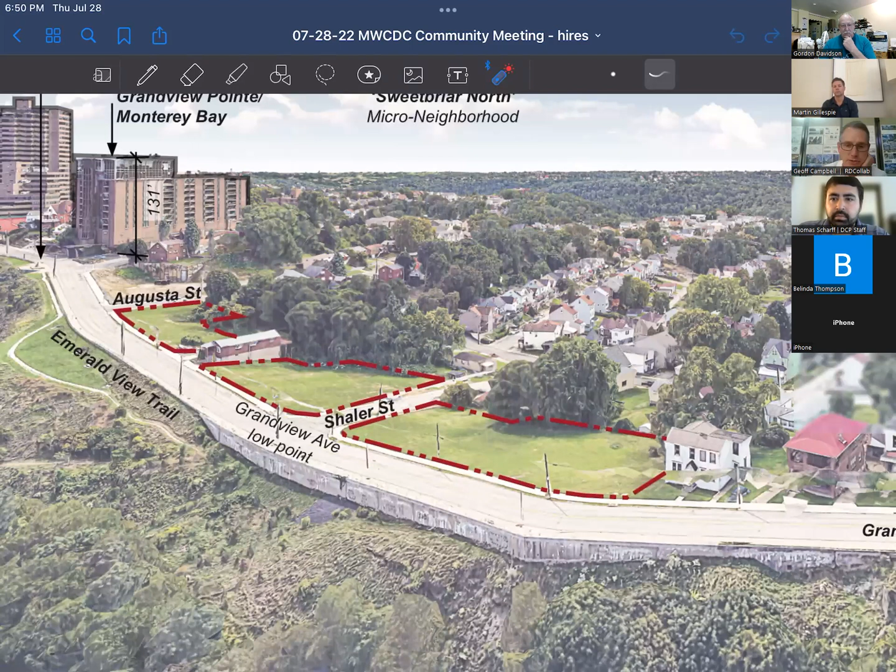Thanks, Marty. Hopefully everybody's familiar with the site. Where we're looking right now is towards the very west end of Grandview Avenue. Currently, we've got the Trimont, Grandview Pointe, Monterey Bay restaurant. There's an undeveloped parcel, and then there are 3 currently grassy lots that are contiguous along Grandview Avenue.

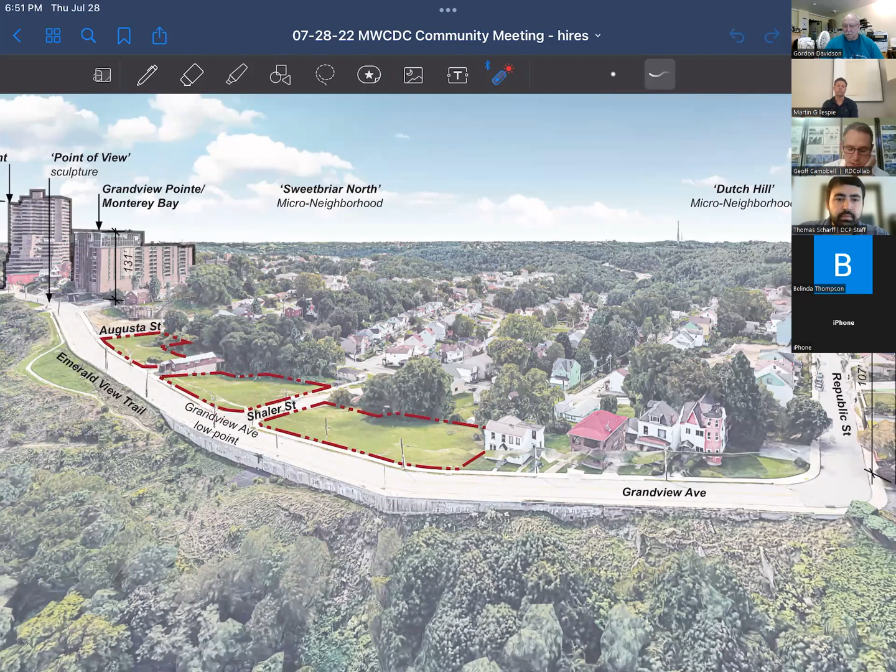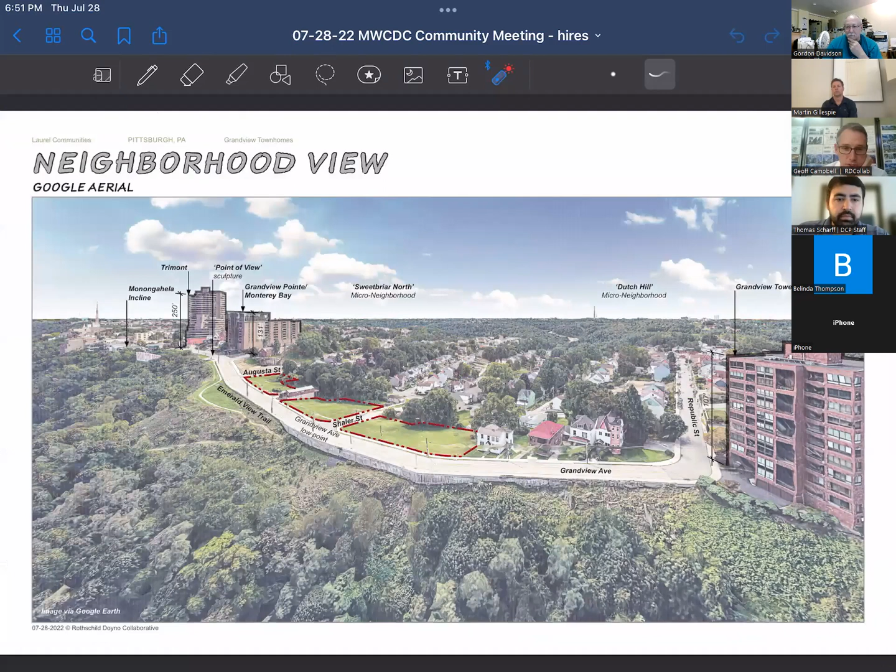So these are the particular parcels that we're looking at. And then, of course, it terminates here, turning the corner at Republic and Grandview Towers. One thing I wanted to call attention to on this aerial were some of the heights of the buildings. Right now, Grandview Towers is 107 feet tall to this point.

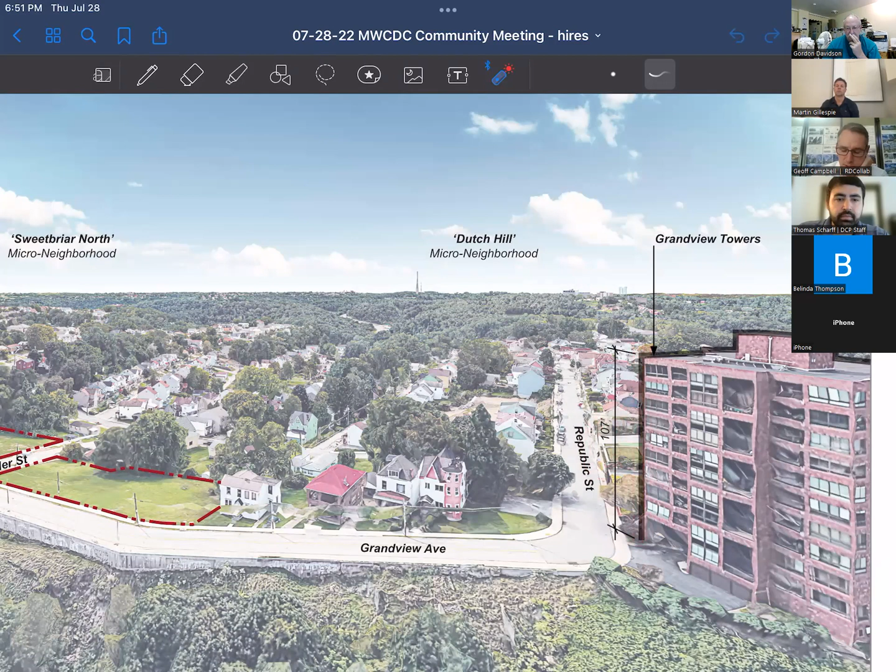I bring that up because, as you'll see later on when we get into the zoning, there's a 40-foot height limit on the parcels we're looking at. There's also the ability to go for a special exception with the city to create a 100-foot building. It's not an option we're choosing to go down, but it is an option the site could do - to create basically 100-foot tall buildings on a majority of the site, which is roughly the same height as Grandview Towers.

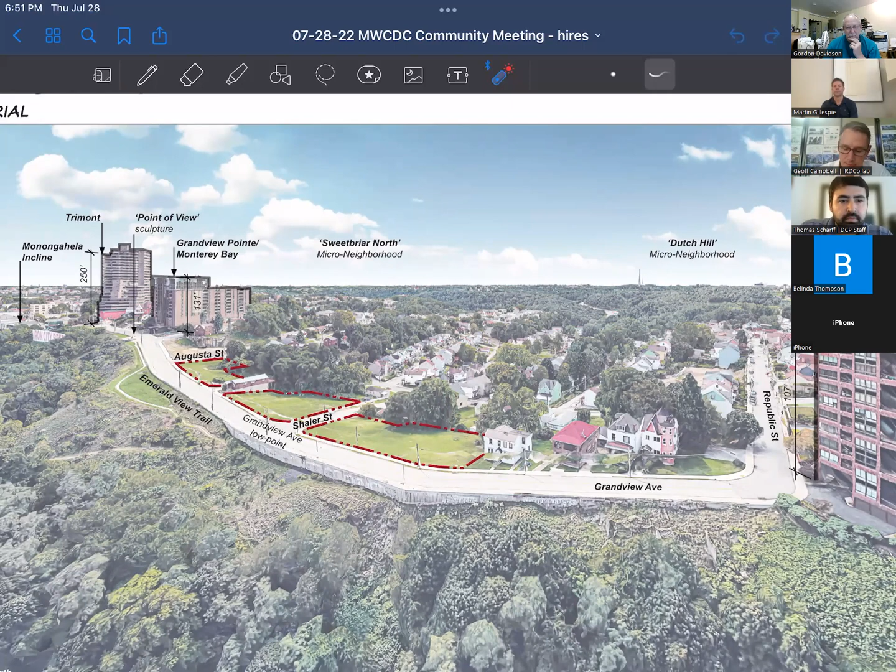So that's the site in particular, and now in more specificity - here we have the rivers to the north. I've kind of rotated you on the site. The parcels we're looking at are actually 23 parcels that are currently subdivided, but we'll be reconsolidating them as part of this plan. They actually create 4 non-contiguous areas.

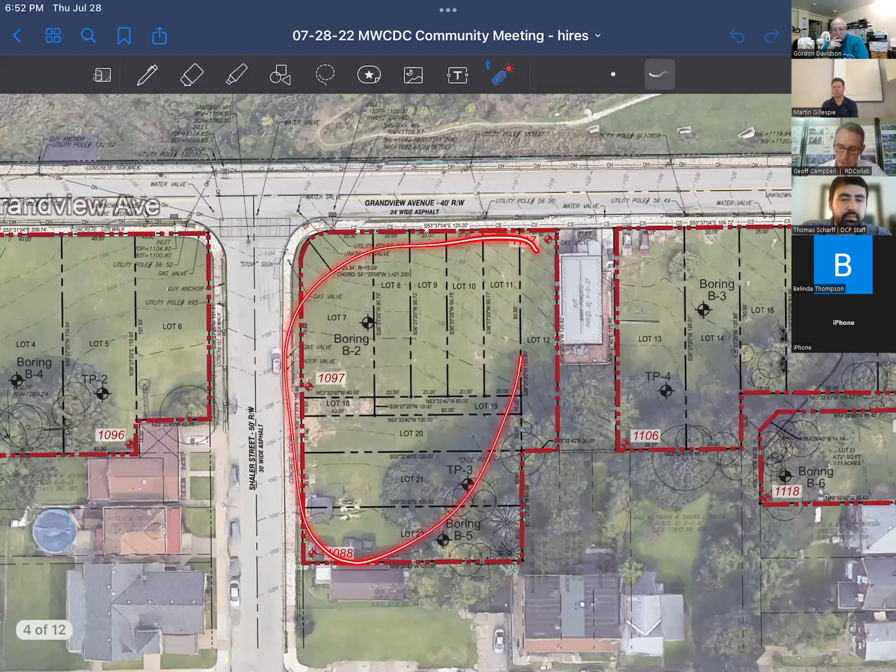So there's one that basically runs from a private property all the way down to Shaler Street. It's broken at Shaler Street. There's another parcel and then another private residence. And then the final 2 parcels run up against the corner of Augusta, currently separated by a right-of-way here. So it's our intent, since we own both sides of that right-of-way, to incorporate that as part of the project through a city process.

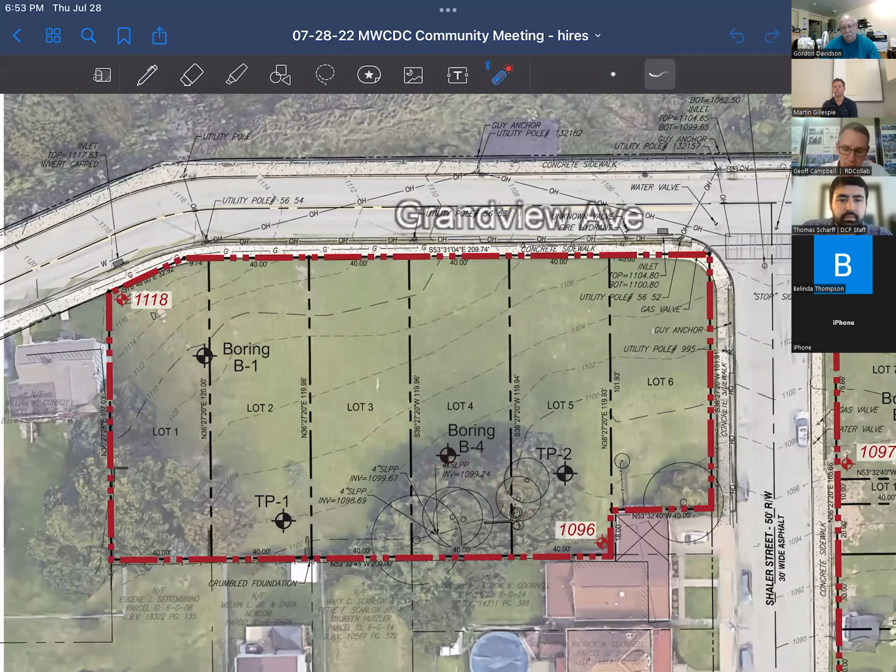Another thing to call attention to, for anyone who's been on the site, is the topography and grade here. I heard somebody reference it as a sledding hill at one point, which doesn't surprise me at all. Right now, on this first parcel, we go from an elevation of 1,118 down to 1,096 - about 23 feet of slope across that site. And that's the one we've been calling the flat one. This one is 1,117 to 1,088.

You can see that's about 29 feet of fall. And then the last one here is actually 33 feet of fall as you go across the corner. That's Pittsburgh, first of all, but it's also something we're extra sensitive to when dealing with stormwater and drainage. We really wanted to make sure we were protecting curb cuts and things like that, working with that grade as much as we can. So it was a big site consideration as we were laying stuff out.

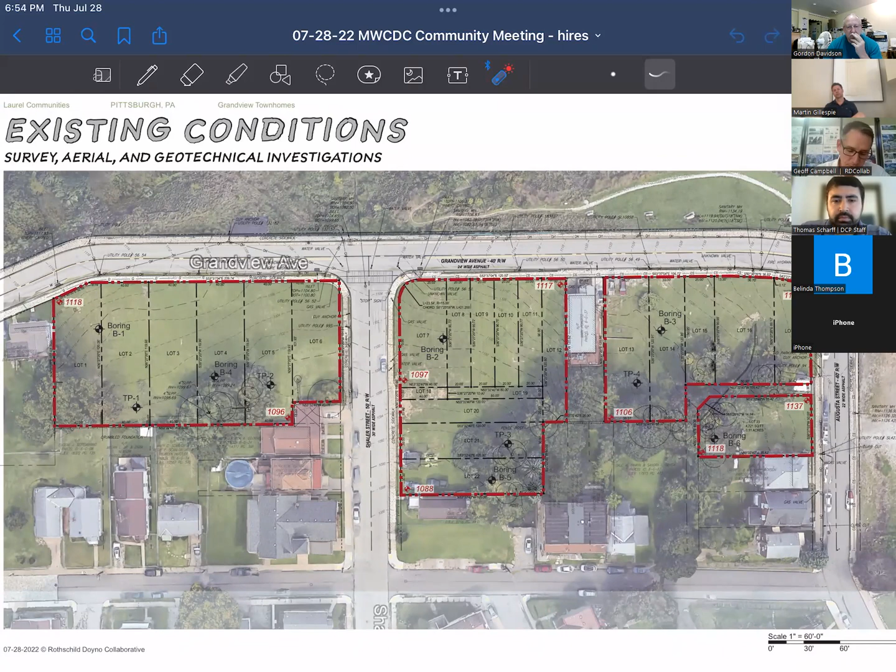The other thing to call attention to on this graphic is the geotechnical work we did. We performed 6 different borings throughout the site, where they come onto the site and drill a hole down, in some cases as deep as 45 feet, to see what's under there. We're very conscious that Mount Washington used to be Coal Hill, so we wanted to make sure we were okay when it came to undermining, and okay from a general grade standpoint as well.

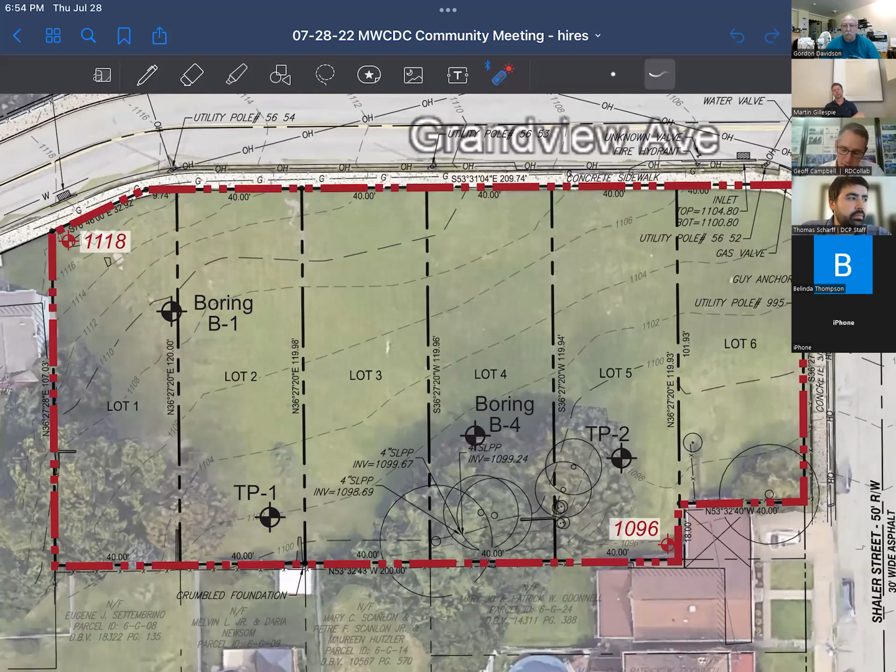We did find out that there is a lot of fill towards the middle of the site. So if the grade itself goes something like this, then the grade underneath that kind of goes even further. It was a big consideration as we were laying out foundations and thinking about what we were doing for the building and for the buildings.

The other thing we were looking at was coal. We did find coal, we did not find any undermining. There were a couple spots where there is still some coal existing under there, but nothing where it's been mined out that would create a potential hazard as we're laying things on top.

So that's the existing conditions. When we met with the development group, they also shared with us the long history of Grandview Avenue and the planning and all the energy that's gone in around here. They had sent a number of reports going back to actually 1982. So in this 40 years of history, it's been a fascinating read to hear some of these recommendations, a lot of which have been codified at this point.

I think the city has recognized through its zoning and through Mount Washington's efforts how significant Grandview Avenue is. It really is a true resource to not just the neighborhood, but to the city and the region at large. We wanted to make sure that as we were laying stuff out, we were respecting that attention to Grandview Avenue. I think you'll see in our site plan some of the moves we've made to do that.

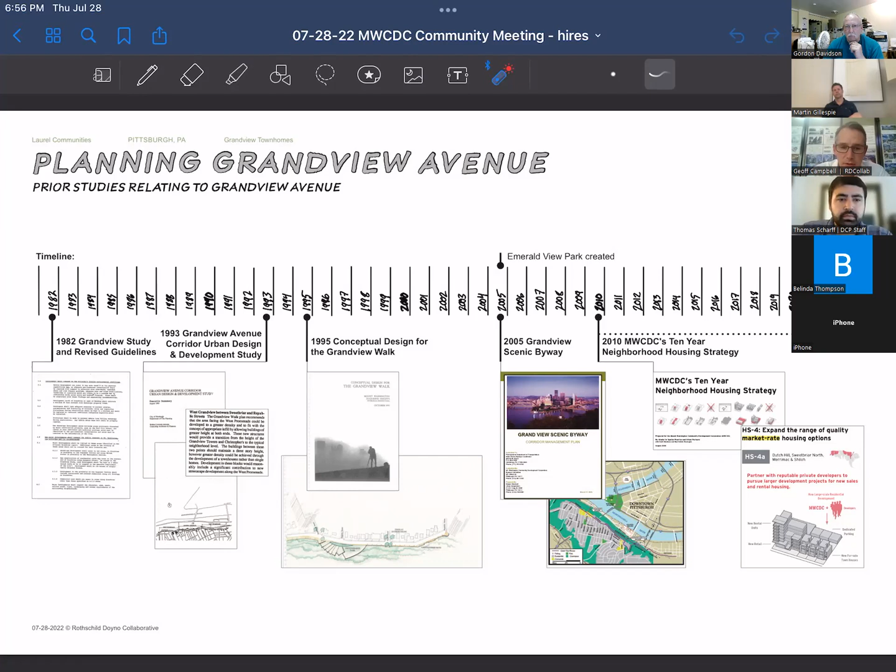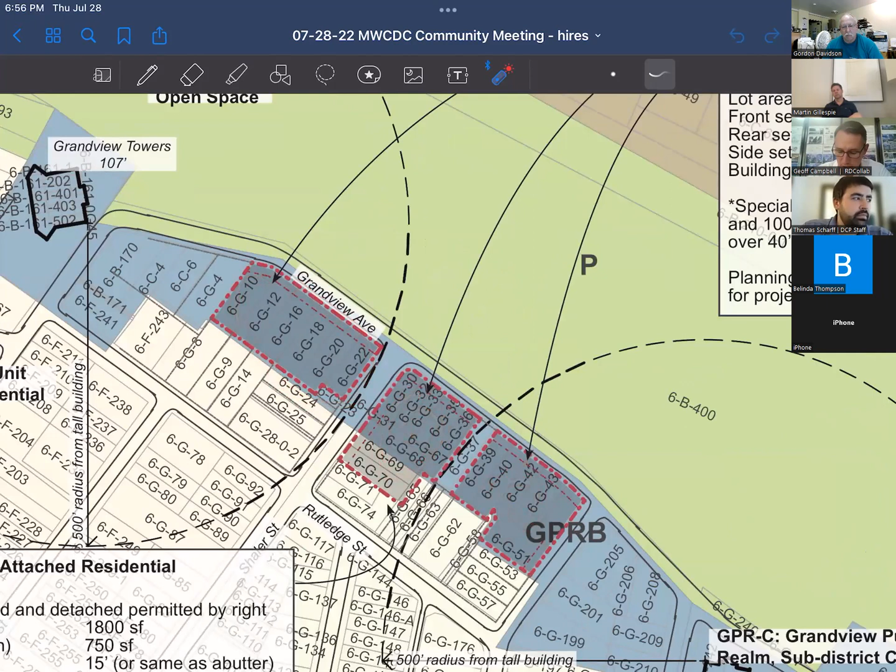And then here we get into the nitty-gritty stuff. This is a zoning map of the area. Our parcels right now are kind of highlighted here in the middle. This is the zoning map you can get online from the city that talks about what you're allowed to do in each individual parcel.

The blue area here, which covers the majority of our site, is what's called the public realm. This is a Grandview public realm, sub-district B. The public realms are just a few throughout the city, where the city has recognized and given special zoning status. The primary focus of which is that they do come to Planning Commission. So if we were proposing what we're proposing in other parts of town and it wasn't in the public realm, there actually wouldn't be a Planning Commission process, it would just be approved by zoning. But because this is such a visible area, that was part of the process here.

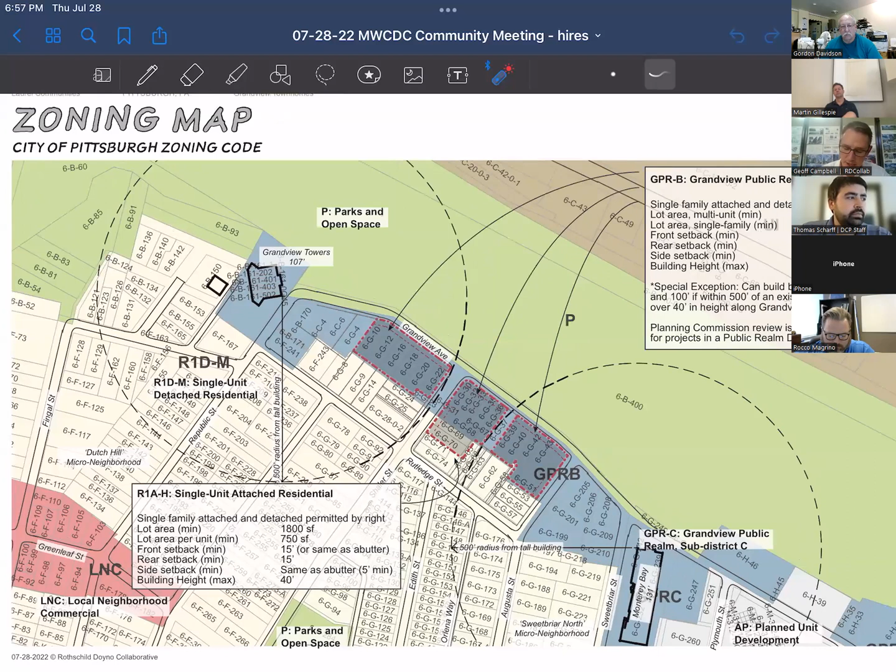So you can see in our breakdown, we are required to do that in the public realm district. We're proposing townhomes, and those are not only permitted by right, but actually in the sub-district, only residential is permitted at all. So right now we feel we're doing everything by right there.

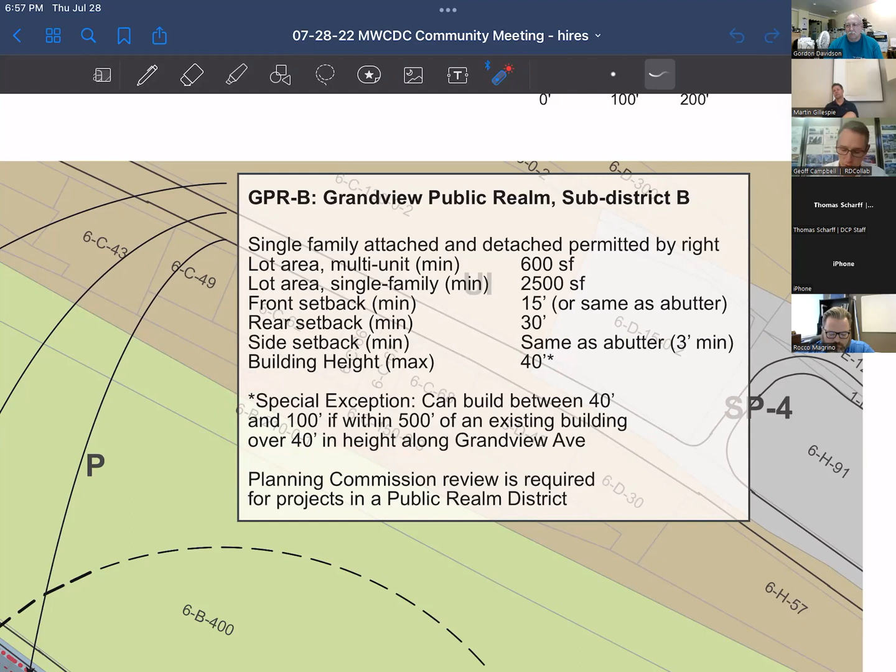And then just a couple other things to call attention to. There's what's called a setback in the front, which means every building has to be 15 feet off of the street. The other thing I mentioned earlier is that building height is limited to 40 feet, although you can pursue a special exception for anything within 500 feet of an existing tall building, to go up to 100 feet. That's what these two circles are, basically working off of Grandview Point and Grandview Towers.

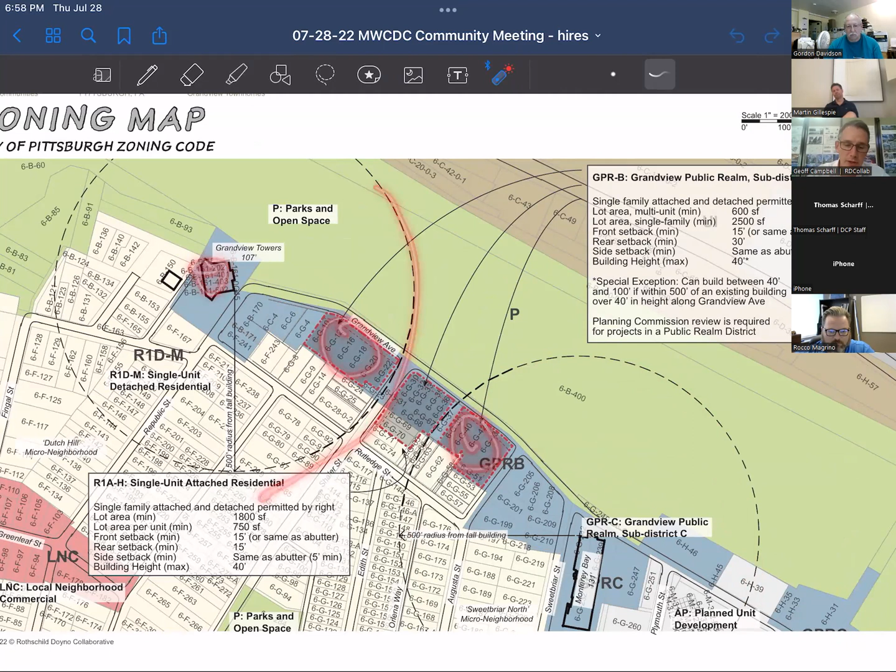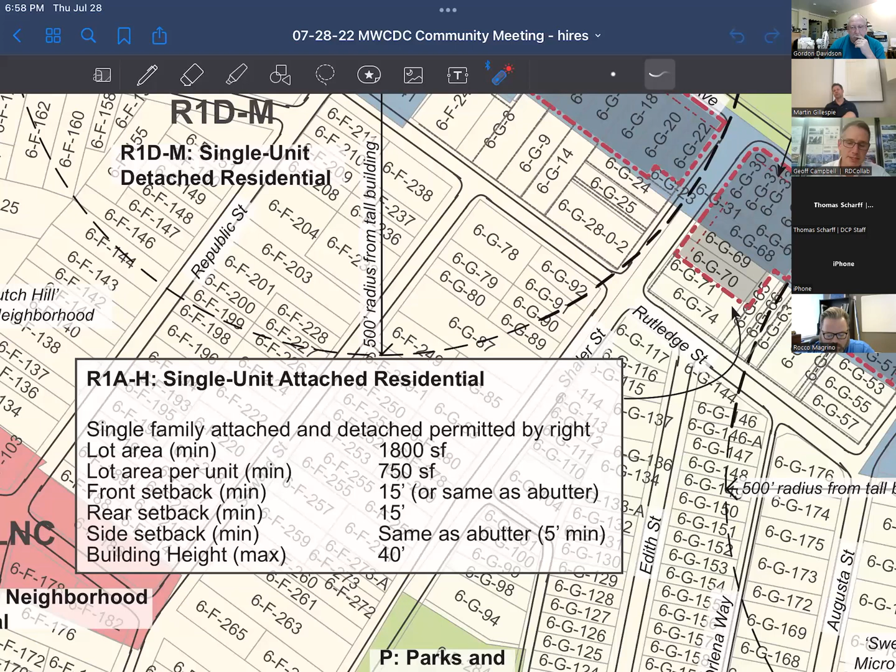A 500-foot circle would really permit anything up to 100 feet within those two areas. There are a couple parcels at the end that fall outside of that district. Those are under the R1A single unit attached high density zoning. It has effectively the same height, the same setback, it just does not have that public process. So what we're proposing would be consistent with this, but it actually isn't part of that review process. That's the zoning.

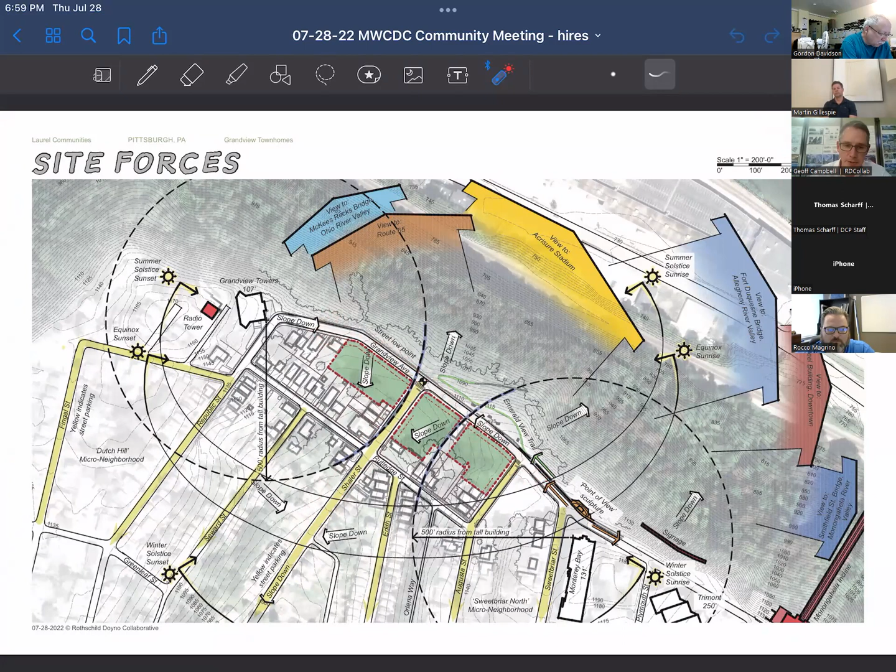And so that led us to what we're proposing. This is a 26-unit townhome, or 26 units of townhomes. As we mentioned, knowing Grandview is where the view is, we really wanted to make sure we were focusing as many buildings as we could to that facade, both because of, frankly, just marketability. I mean, that's where you really want to put your building, and that's the view sells. But then also just from an urban standpoint, this does create more of a streetscape, more of a pedestrian-oriented experience up there.

In doing that, we also knew that we didn't want to put curb cuts. We didn't want to put garages or driveways along Grandview Avenue. We wanted to make those backloaded as much as we could. That was a little challenging because of this grade issue. You can imagine with the sloping in so many different directions as you come back, to get driveways to the back can be challenging. But we're pretty happy with where we ended up.

We basically end up with 3 blocks, and each one of those blocks only has a single curb cut, so anyone who's trying to get into any of these parking spaces, or into the back of their garages, would basically only come through that curb cut rather than having individual ones. It took a little bit of work, and Rocco and PV were able to really work with the grade to figure out how to do it.

We tried, I can't tell you how hard we tried to have a curb cut off of Augusta, but we just found the grade was too extreme there to be able to put it over there. So when we ended up doing this, we did have to put one curb cut along Grandview. It wasn't our first choice, but it was really a necessity. The only other option there would have been having curb cuts in each building to get into that front. So we do have one here. Some preliminary plans we had another building there, but we eliminated that building in order to get that curb cut to work.

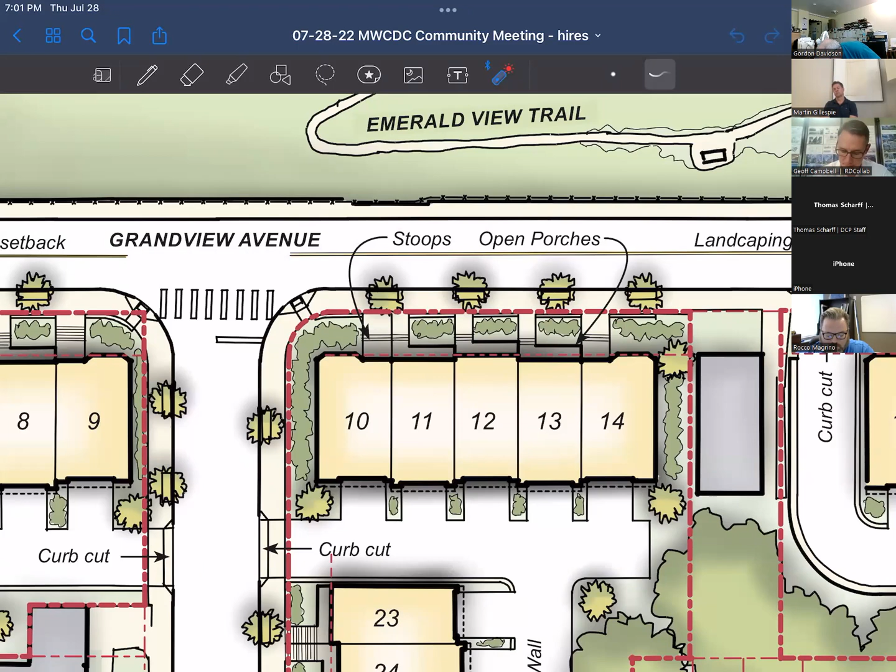So then before we go into the elevations, the other thing we like to do is when we're laying out a building, we really want to try to make these buildings as contextual as possible. Marty, as he mentioned, and Laurel has a long experience with townhomes, and they've come up with some plans. They know what the market responds to, some nice, open, really contemporary plans that have been very successful. But we also want to make sure that they fit into the neighborhood.

When we worked on those projects in the Strip District that Marty shared earlier, we were the architects for both. There really aren't that many townhomes there, but we recognized the prevalence of brick, and tried to pick up on window patterns that are out there, things like that, to make something that felt like it belonged in the Strip District. We're trying to do that here as well on Grandview.

One of the challenges, though, is that Grandview is almost defined by its eclectic nature, because these buildings have been developed over time. And frankly, I think because of some of the more high value real estate, they tend to be a little more stylistic, so you end up getting a lot of different styles all over the place.

So we looked for some themes, tried to understand what we could do. We had a big study that really looked at a lot of these. I just picked a few excerpts here to share. For some reason the one on the right keeps fading out, but I'll come back to that.

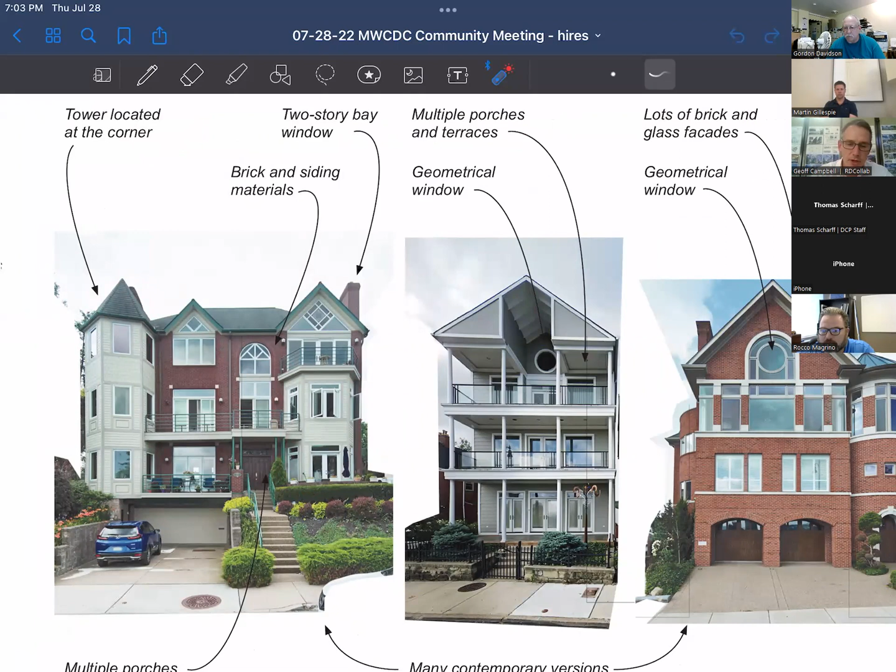But you can see, one thing we were kind of surprised at was a lot of towers, a lot of two-story bay windows, you get the chamfered view there. That's something that popped up a lot. I suspect it might be because of the views, you want views in more than just straight out, actually in 360 or 180 degree shots.

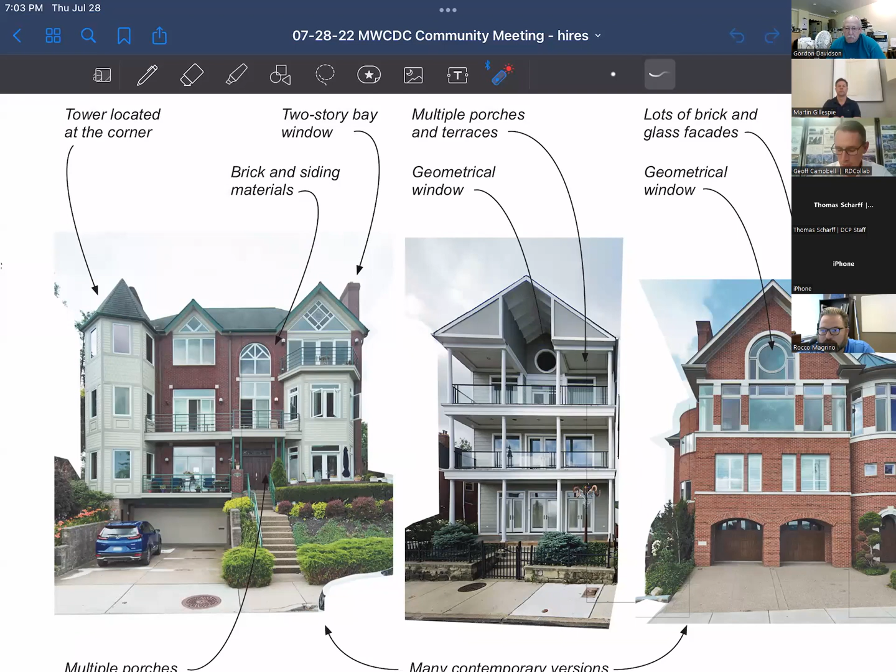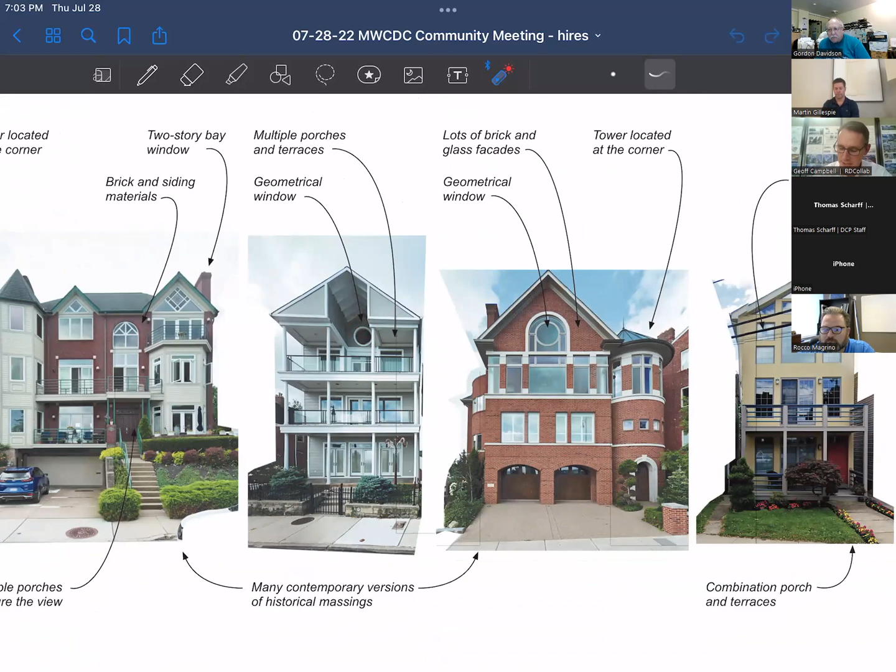Another thing was terraces. Obviously with those views, it's not like there's just one porch or one terrace, a lot of times there's multiple terraces in the area. Decent amounts of brick. For some reason there's a lot of circles in windows. We didn't end up running with that, but I think that's more a sign of the times than anything else. And then, of course, lots of glass as well, with those views you want to maximize the light.

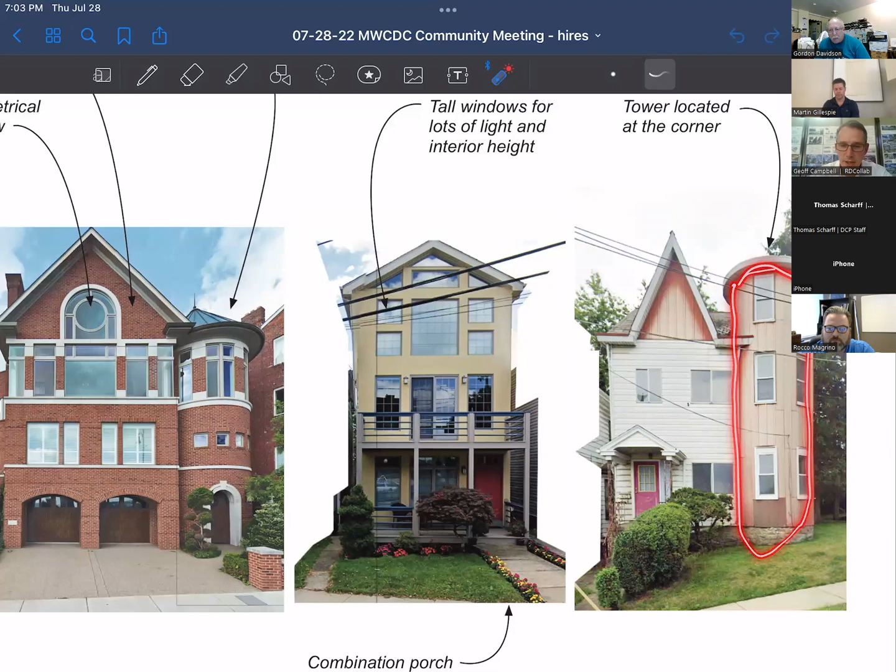And actually here's the building right on the corner of Republic, with another one right at the turret there. So that's what we kind of looked at.

We thought about it a lot, tried to process it with the floor plans that we knew worked, some of the styles, things that we knew the market would respond well to. And we're proposing these as elevations right now.

So we really tried to work a lot with a mixture of materials, we use brick, we use different fiber cement. We wanted to make sure the stepping of the buildings really helps break them up, create a little more individuality as well. We have different window patterns on different buildings, something we're playing with and will continue to play with as we move forward.

We also started to incorporate that chamfer, or that two-story bay tower, on the ends of the units, just to relate a little bit to the Grandview neighborhood, or to the Grandview street, but then also give the buildings themselves a little more difference.

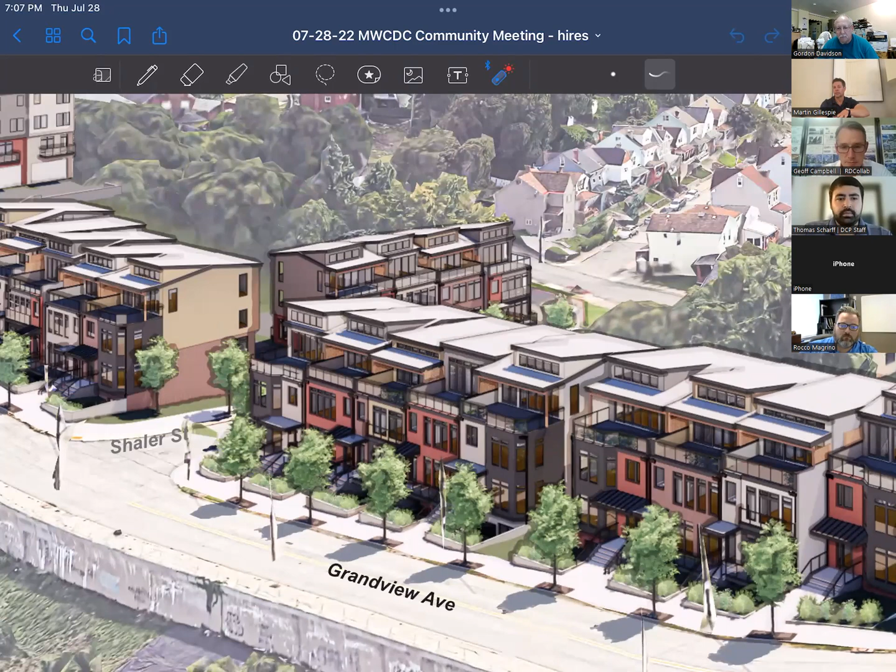So what we do know is, like Geoff said, we're going to have a combination of brick, HardiePlank, some good contemporary design, a lot of windows, things like that. I think in general this at least represents what the development would look like.

And again, like Geoff said, I think the one nice thing about this project is it's per the zoning, use by right, exactly what is in the city ordinance. We don't always have projects where we don't have to ask for an exception or a variance. In this case, we don't have that situation, so we're hoping that's a pretty streamlined process.

And like I said, this is a great opportunity for us, and hopefully to add some nice units to the neighborhood. So with that, I'm happy to open it up to questions. Rocco from engineering, Geoff the architect, and then myself as the developer builder, we're happy to answer your questions.

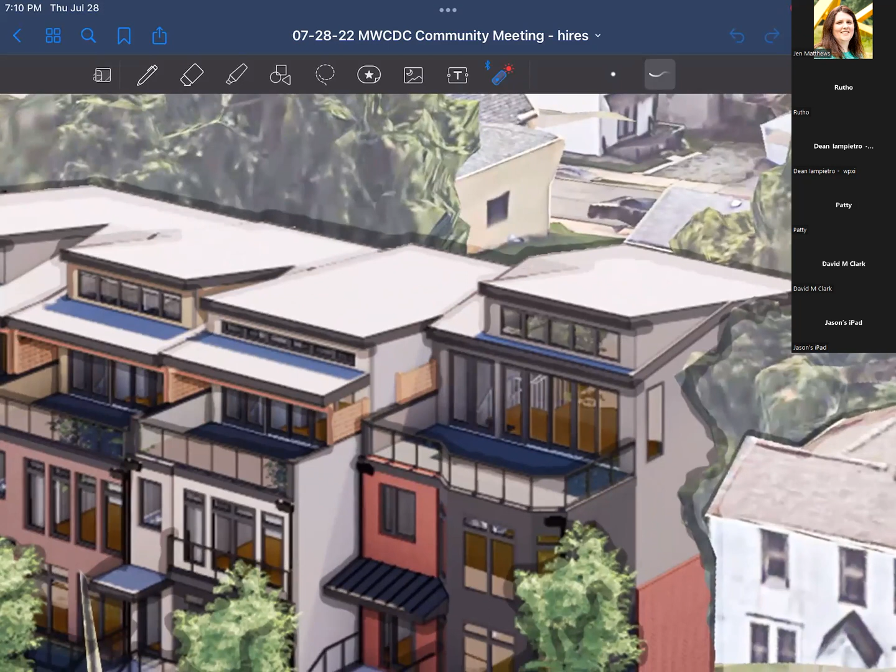Yeah, so the depth of these units on the roof, Jeff, is we're going to be like 42 to 44 feet deep, correct? Correct, in this direction. Okay, so that's not just a balcony, that's an actual outdoor living area. The width of those on the ends is around 26 feet, and the outdoor area is going to be about 18 feet. That's a better view, thank you. So that's actually bigger than it looks in this photo.

And then on the inside, we'll have a large area that's like a party room, a flex room where people can do different things. We'll also have an option to do a bedroom up there with a bathroom, so you could have a bigger area like what the people in the strip did. Yeah, I've been to your brownstones in the strip, very nice, I almost put a deposit. I live on Grandview right now, so.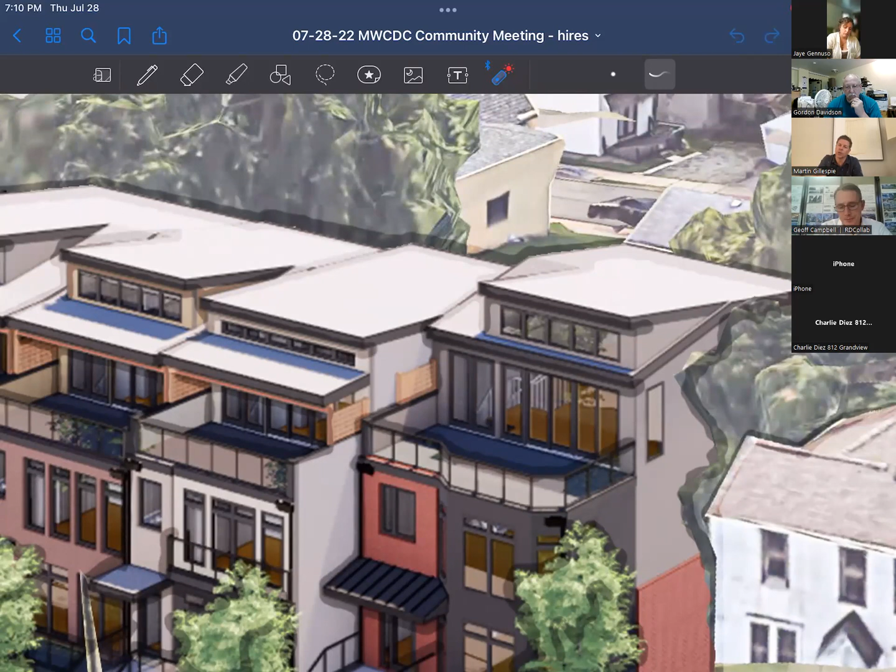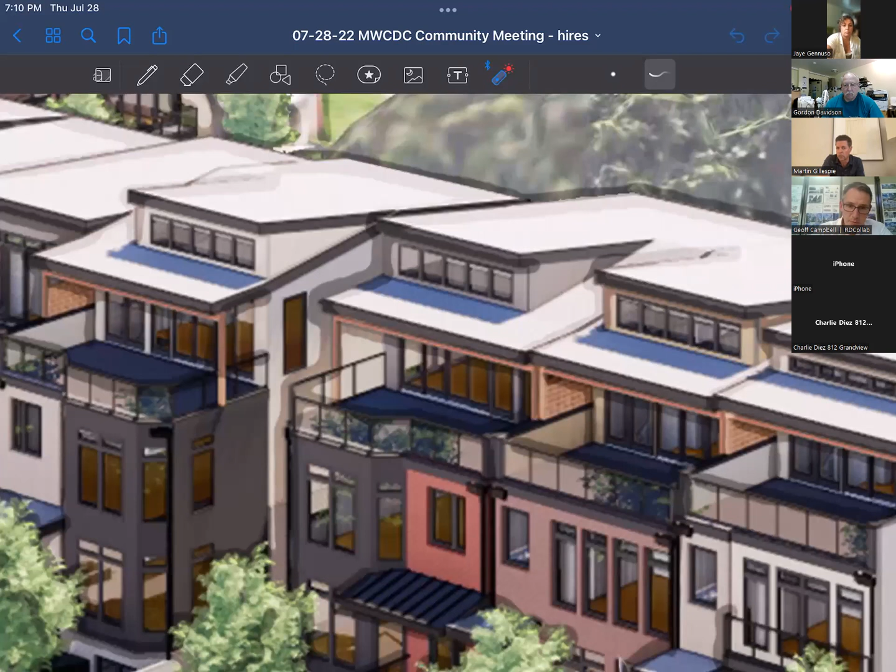Okay, yeah, we're going to focus on that. Like I said, we're still in the concept phase, but different than the bakery project - if you notice on this one, we have the option for some covered outdoor area, whereas the other doesn't have it covered at all. That's the first time in any of these projects we've been able to do that. So there'll actually be an area where you can sit out on the deck and put your furniture, and those areas are actually going to be bigger than the ones we have in the strip.

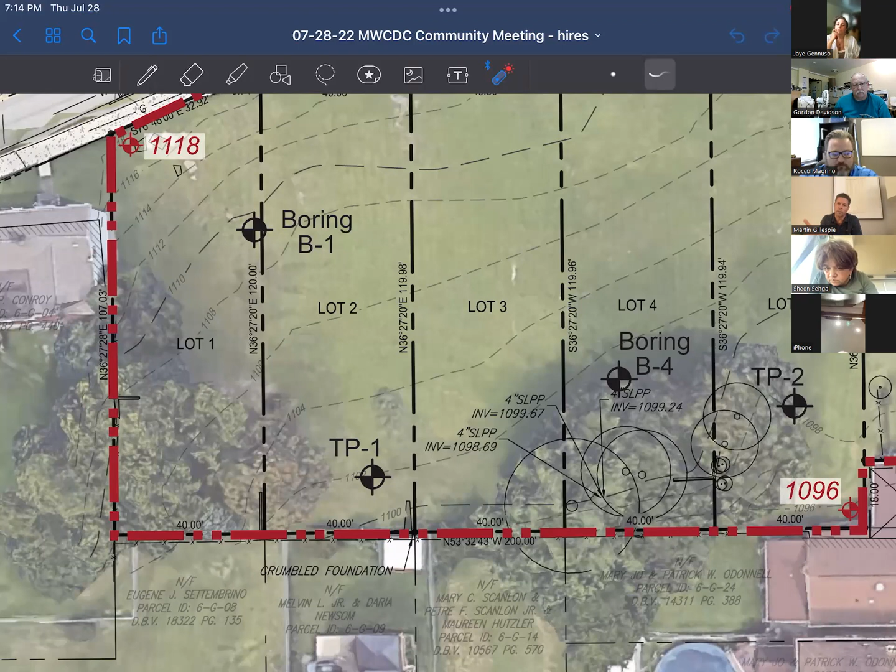Now that we know the layout of where the townhomes are going to sit, we'll do additional borings there, because when we build these townhomes we have to get a geotechnical letter and recommendation as to exactly what type of footer — caissons, spread footer, or traditional footer. In the projects we've done, it could be all three — some areas caisson, some spread footer, some traditional. So we'll go out and drill that. These were done preliminarily, since we're in our due diligence period. You're going to see more drilling out there.

The only concern I have is that behind me there are three sinkholes, and when they were out here digging B4, the actual drill started to sink. Yeah, that's good to know. I appreciate that.

We will talk to Pennsylvania Soil and Rock, and when they go back out there we'll definitely find out more about what's going on. I would question the B1, because I have not seen any mark to show that it was drilled down 13 feet. Well, they charged us for it, so I'll definitely check into that for you.

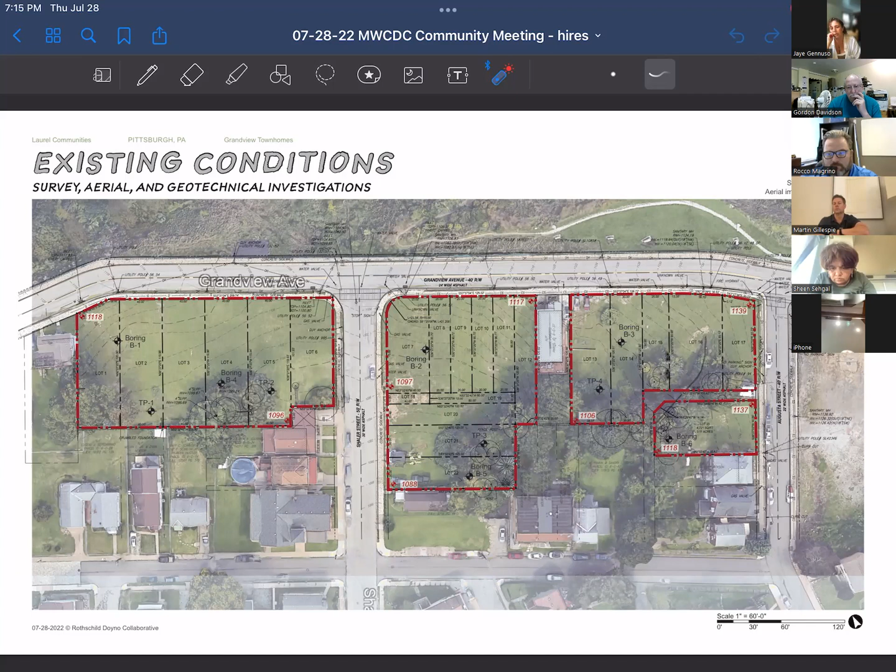Okay, and then another concern that's been brought up is the 100-foot variance you guys keep referencing. As far as my understanding with the Grandview Public Realm, that 100-foot reference, those buildings were already there before that was made Grandview Public Realm. So those shouldn't technically affect that. If you made a change now, that would affect it, but the buildings already there shouldn't technically affect it, you should be able to go up to 100 foot. That's my understanding from what I've been reading, and I may be wrong on that.

I think those were there before that realm was even decided upon. Geoff referenced that because when we evaluated the site, we were looking at whether we should do apartments or a condo building. Again, we've settled on townhomes. So the 100-foot thing, whether it's there or not, the point is moot because that's not what we're doing.

Well, I understand that. I think that's just been a big issue for us because Betters had tried several times to put in condos back there and there's just not the support for it. Even just the trees he's torn out, my yard and my neighbor's yard have now become swamps. We've lost the tree in our backyard because of all the extra runoff, because there are two natural springs underneath there too.

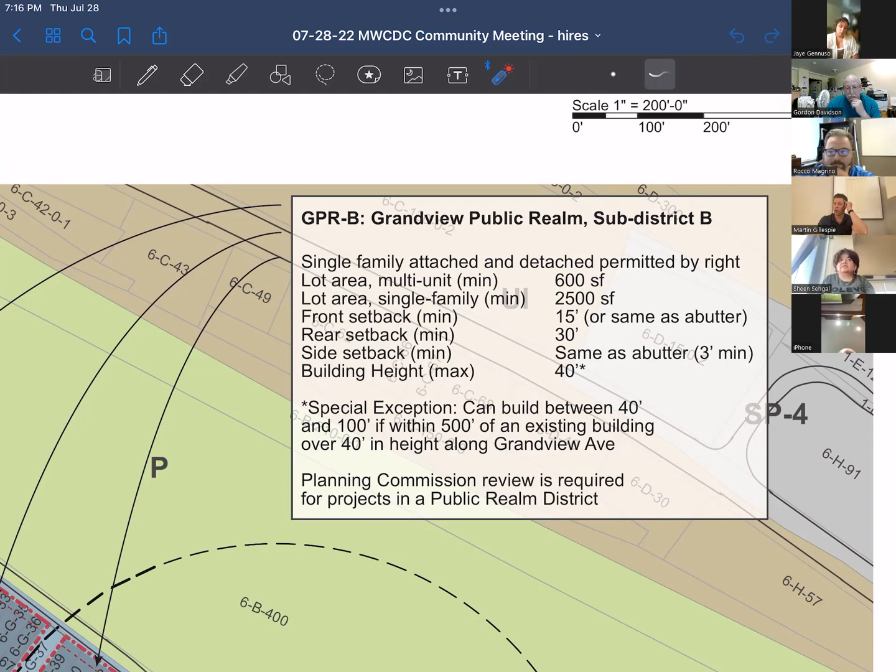Chuck gave us some of the history. Obviously he's the owner, that's who we're buying it from. We have it under contract, he still owns it. We're going to buy it once we know exactly what is going to happen with it. But the townhomes, like I said, the good thing is they're used by right, so it's not something that Chuck was going to propose.

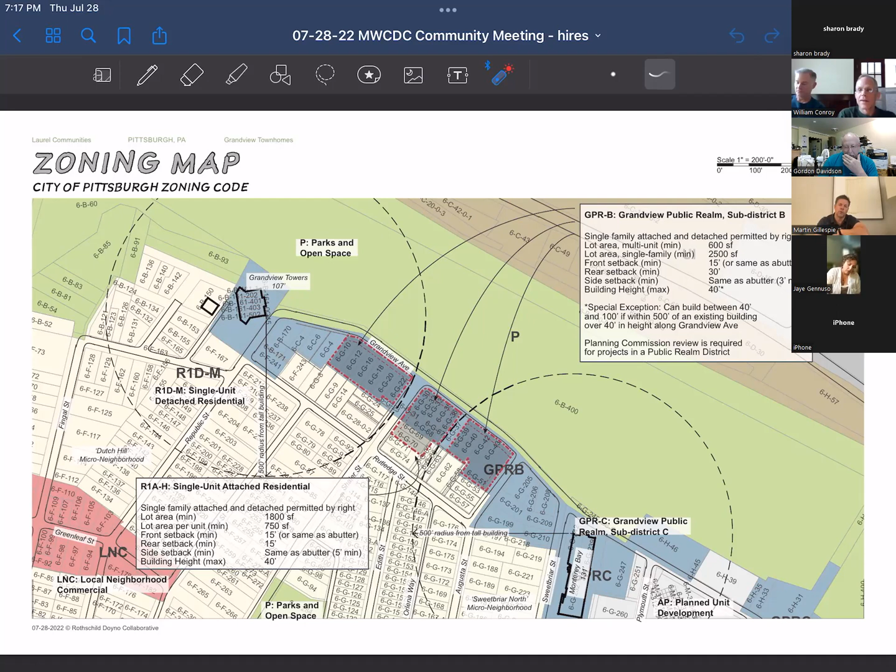I raised my hand, but I'm on Zoom. Two quick questions. Can you tell what the main material is to build these? And what do you expect the price to be to buy one of these? Okay, so just to clarify, when you ask about the main material, what do you mean?

Brick, stone. So hopefully it'll not be wood. No, it'll be a combination of brick and Hardie plank. Hardie's a masonite siding board. Those will be the two main materials on the exterior. And then the windows, we use Andersen windows in all of our projects, so these are the contemporary 400 Andersen style windows. So there's a lot of glass.

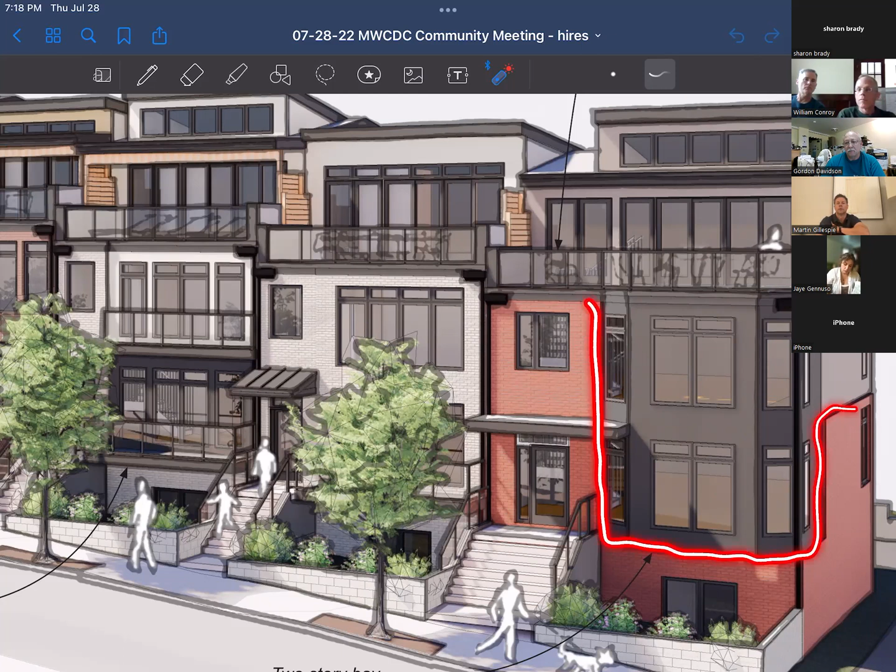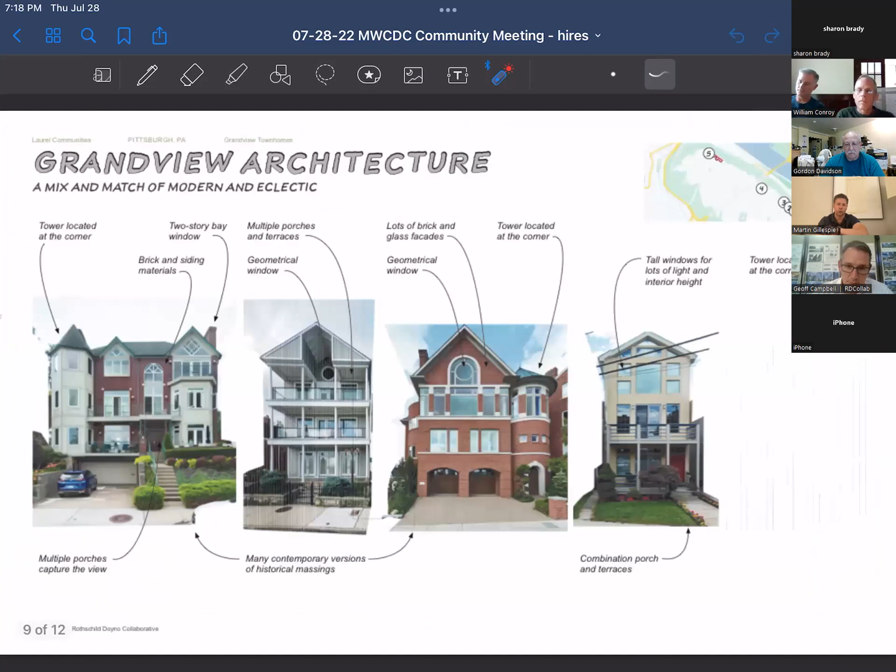I'm just circling right here as an example. So right now this is proposed as brick, this could change. So like that could be brick, but again we're still on Rev number 2. We'll go through probably 10 revisions before we get to the final point. So there might be more brick, but the main exterior materials are going to be the brick, the Hardie plank, and then a lot of windows.

And then your approximate cost for one? Yeah, so the Grandview units, all the ones on Grandview, will be over $1 million. We think they'll range from $1.2 million to probably some close to $2 million, maybe even some over $2 million. And then the ones off of Grandview will be probably $800,000 to $1 million, $1.1 million.

Crazy. Thank you. Yeah, and again, we did 52 townhomes at Bakery Square and sold those in 18 months. There are 46 townhomes in the Strip District, many over $1 million, and we sold those 46 in less than 2 years. This is 26 units, so it's a smaller project compared to the other two. I think our pricing for the market is good, there are people already who've inquired on this project, so we feel pretty comfortable about where that is.

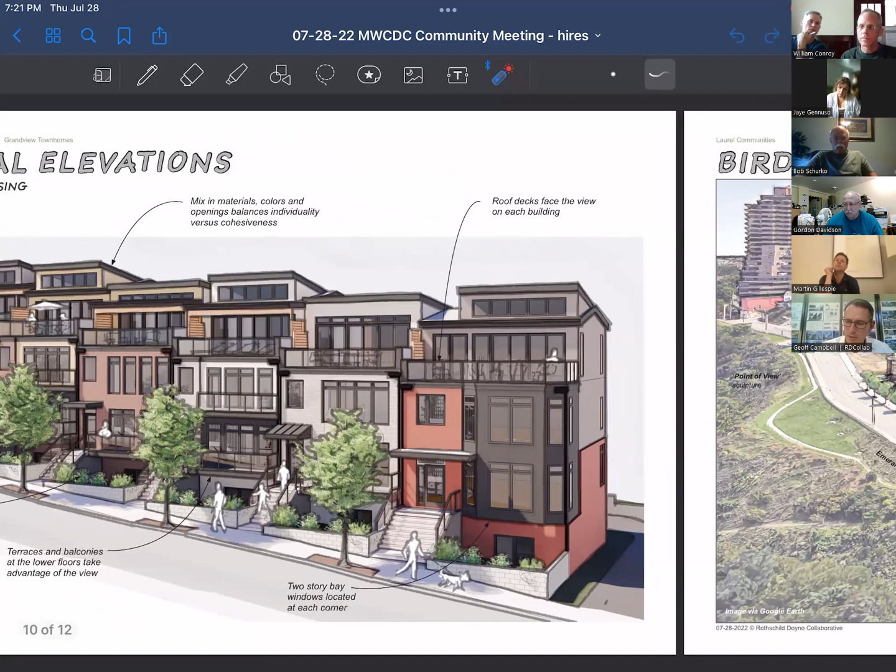Yeah, I believe it's maybe a minimum 3 feet in some spots. I can check while we're meeting, maybe I can check on that exact dimension. But I think the answer would be, yeah, we're gonna make sure it's 15 feet, and then we'll make sure it's at least 3 on the side yard.

And the 15 feet, does that go from the curb, where the curb meets the street, or from where the sidewalk meets the yard? It goes from the property line. So the property line is roughly at the back of the sidewalk, but it does vary a little bit. So it's an imaginary line out there, and that's what we're coming back 15 feet from. Okay, so you might be a little more than 15 feet back from the street in some places because of the sidewalk.

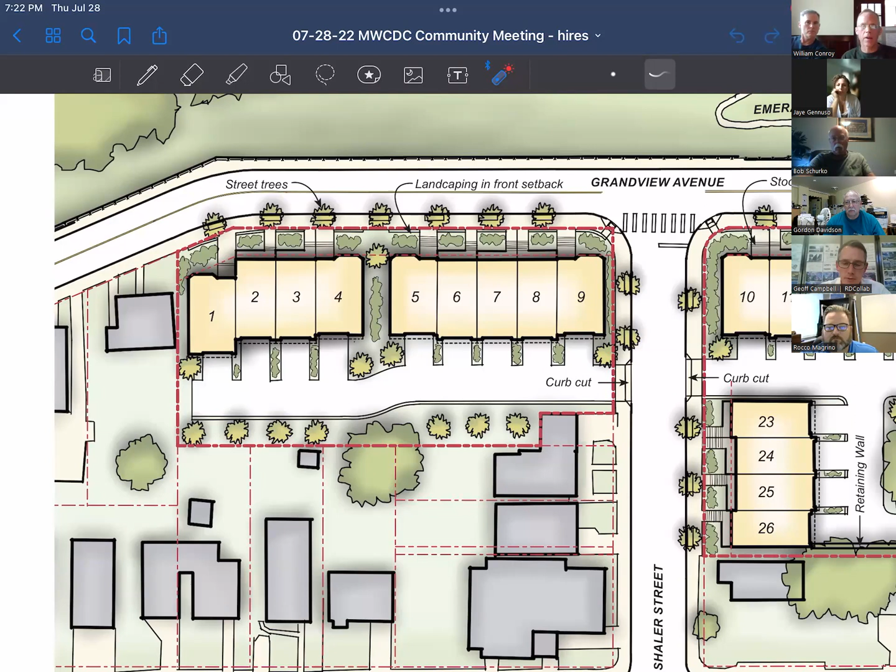Correct. And my biggest concern is the street trees. I heard you saying it's a city requirement to have street trees, but even for the buyers of your properties here, those trees are going to obstruct the view somewhat. I know you can go above the trees, and you have to be really careful about what kind of trees are planted there, because I've lived in a townhome development where they put little sticks in, and 20 years later they were just tremendous trees that nobody really planned.

So I personally would prefer not street trees, but some other kind of landscaping. Is there anything shorter that you could do? I think that's good feedback. PVE Engineering has a registered landscape architect on staff that does the choosing of the plants with us, that will go through it. So I have a feeling the city is going to require street trees, so we'll see.

Let me ask - what's the smallest tree you can get? Because even a red bud is pretty big. John Kamen's, our attorney, just texted me that the city code is going to require street trees. So I think what you said is important - we'll make sure that we pick trees that, as they mature over their lifetime, aren't monstrous. Are they going to be 2-story tall trees though? Because most trees are at least 2 stories.

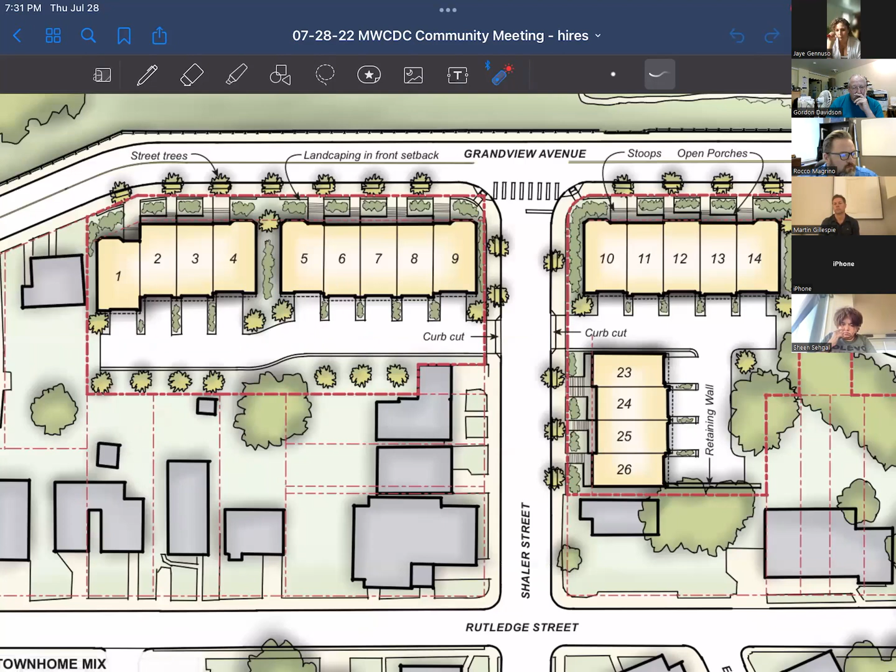Okay, because again, I'm just concerned, and I just want that, with that grade going up, if you were up towards where that would be going into our second floor with LED lights. Yeah, we'll look at the landscaping in the back there. I hear your comment, so we'll make sure we talk about that.

And would you guys be open to doing a community meeting, just like meeting at the church down there, especially for the residents that are in the immediate area? There are many that weren't able to attend the Zoom or don't attend MWCDC meetings that really just wanted to be part of it and know what's going on.

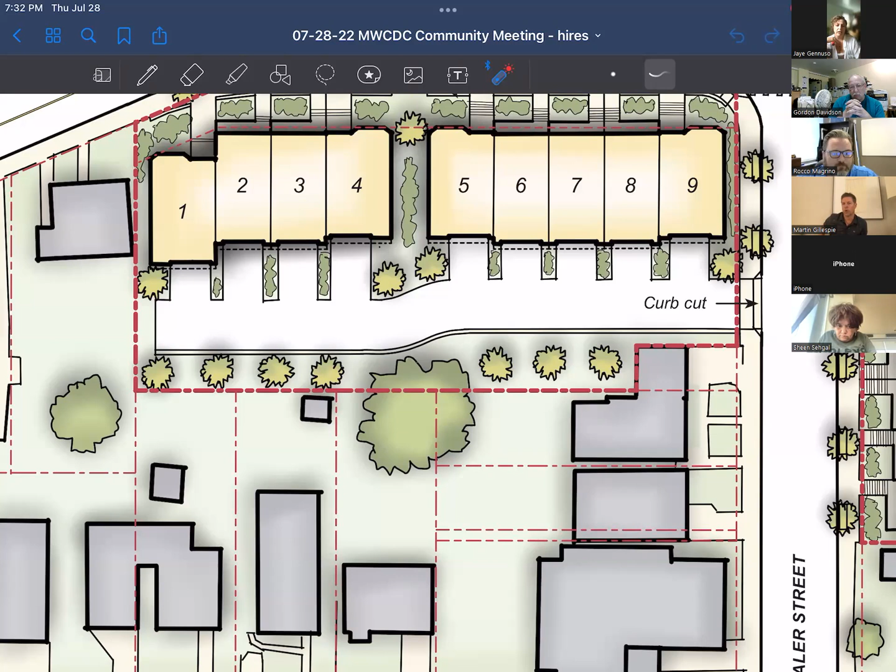Well, I think that's part of the process here. I think with Gordon, and this is the second time we've talked to Gordon, I think Gordon will be able to communicate it. But the lack of communication between the MWCDC and the Duquesne Heights area. Yeah, Gordon, I don't know if you could speak to that, Gordon. Well, that's what I would want it out. Ask for it outside of Gordon and the MWCDC is what I'm asking.

What I would say is that the city has an RCO process, which is what we're going through. I think if there are specific questions that you have, and I know the city's taking notes on them, we're happy to go ahead and take those into account. And this is a collaborative process. There will be a planning commission hearing on it. There'll be other opportunities for comments on it to go forward.

And I understand that. I was just wondering if you would be willing to have a meeting with the community just to inform them, because there are many that are not participating with the MWCDC and have issues with them. So I'm not saying as a city process, I'm just saying as a developer moving into the area and doing work. Yeah, what I would tell you is the short answer is probably no, because the city has the RCO process.

We're happy to have small meetings if you want, just for the immediate. We're not going to go ahead and subvert the RCO process. We're not creating a new process. The city has a process that we're following. So I don't want to talk badly about a CDC or an RCO, and that's not the purpose of this meeting.

Yeah, no, I'm just saying that there's an issue between the two. So the residents that aren't attending, I would just like it for the immediate residents that live next to the properties, that's all. You've made your point. Thank you, Jaye. If they choose to, they will communicate with you or us.

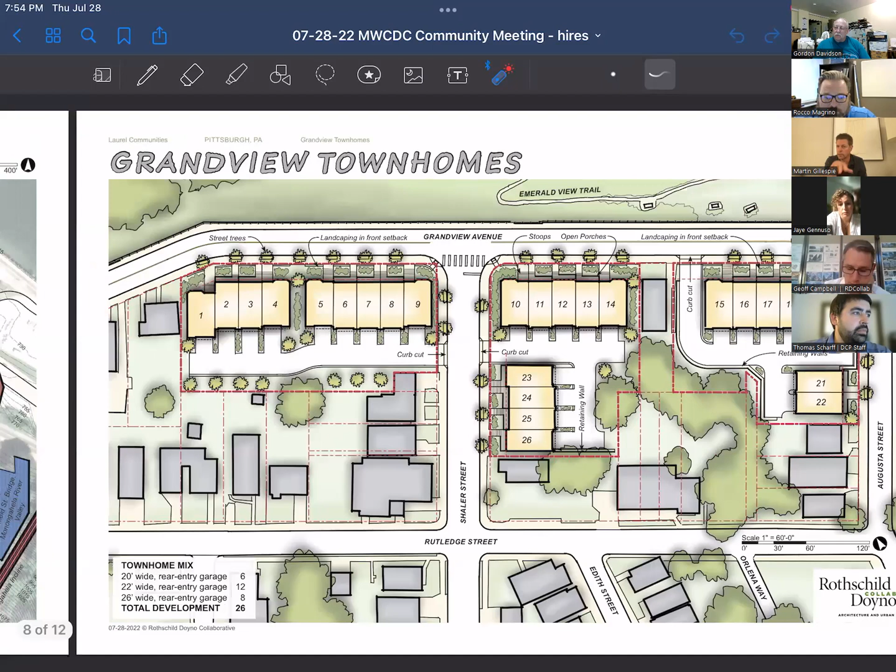It's 26 townhomes. That's what's going to get submitted unless we find something out that would be shocking. But I think we're far enough along that there's going to be nothing significant in the changes for this development. Gordon, I'm happy to get you the presentation before we see that.

Does anybody have any more questions? Oh, I see something in the chat, bear with me. Annie B liked the questions. David says the Amazon drivers are going to have fun. Okay, there aren't any more questions.

Anything else? Thomas, do you have any closing statement? No, I think if there aren't any more questions... Hello? Just got a couple on the phone, can I say? There's somebody on an iPhone who appears to say something.

Pre-construction, can you alter or perhaps take 2 units instead of 1? No. That was the quickest answer all evening. I'm happy to oblige, Gordon. All right, I got another chat - Annie B thinks it was very informative, and thanks everyone.